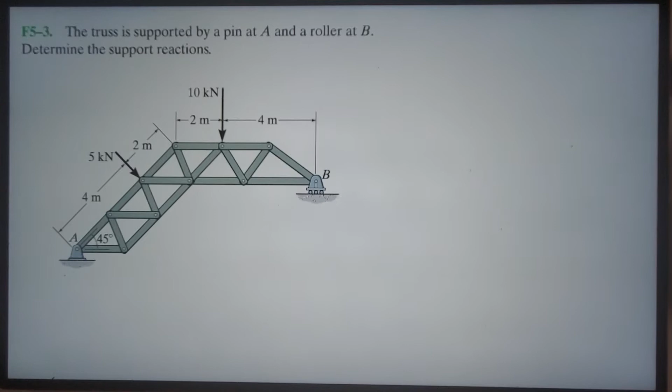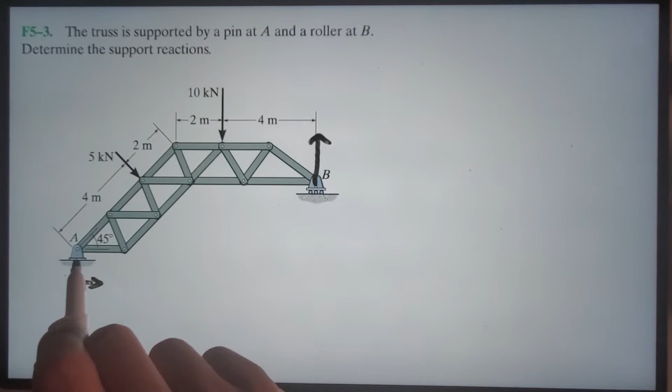This type of support has many balls over here, so it can move freely in the x direction. Over here, the force in the x direction should be equal to 0 because it can move freely. There's only one force acting on it, and that is the normal force, and it's pushing up against it. With this type of pin connection, you can have a force in both the x and y direction.

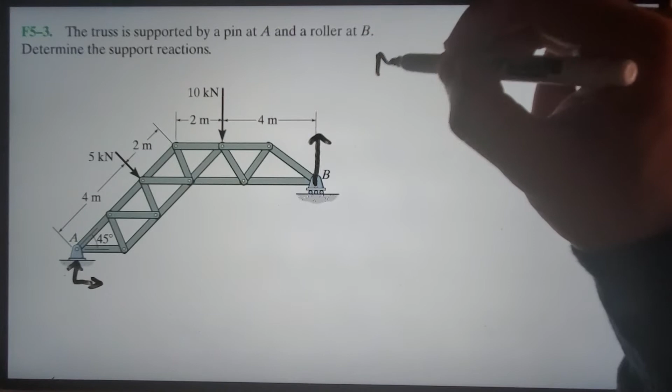Before we do anything, I'm going to write down the magic formula over here. The moment or the torque is equal to x times F in the y direction minus y times F in the x direction. All right, so we see all those forces acting on different positions. So I'm going to call this my origin. So this point is my 0, 0. I'm going to get the coordinate of each point over here. So this is point A, B, probably call it C over here, and call it D over here.

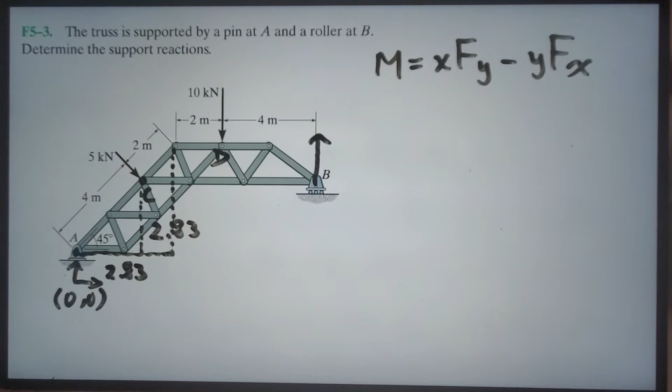Okay, so over here is 4 meters. So the x component from here to here, this is 45, so it should be equal to 4 times cosine 45, and that is equal to 2.83. That means the height over here will also be 2.83. All right, so what happened with the x value over here? I'm looking for this point over here. It will be equal to 6 times cosine of 45. That is equal to 4.24. So the y will be about the same. The y is 4.24 from the top to the bottom over here.

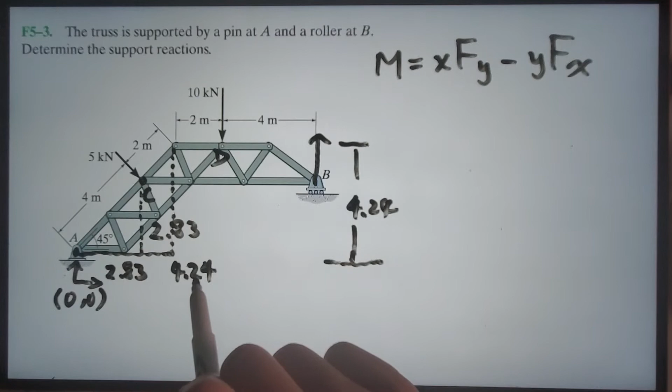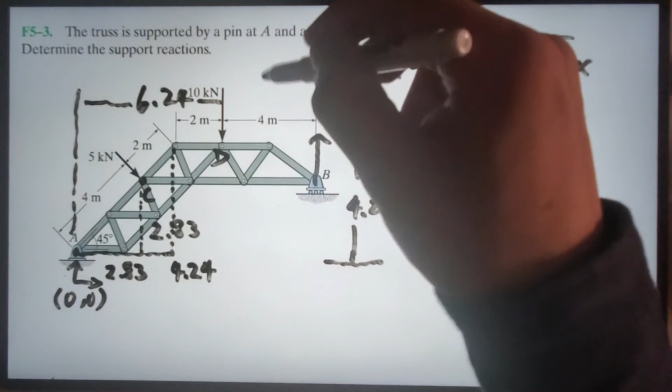All right. So what is the position over here at point D? Point D has 2 meters, so it should be 4.24 plus 2. So from here all the way to here, it will be 6.24. That is the x, and the y will be 4.24. The one over here, the x component will be another 4. So you add 4 to it, so it will be 10.24. That's the x of this one, and the y will be 4.24. All right, so we just found the coordinate of each point.

So how do I set up the equation? We may need more space, so let's write everything in a very clear way. Now, this is our pivot. We have 1, 2, 3 different forces acting on it. We're going to use the same formula. So this force has both the x and y component because it's 45 degrees over here. The x component is going to the right, so it will be positive 5 times cosine of 45 degrees, and that is equal to 3.54. So going to the right will be 3.54 kilonewtons. Going down should be negative 3.54 kilonewtons.

Okay, so x is over here. It is 2.83, so 2.83 times force in the y direction, that is negative 3.54, minus y, that is 2.83, times the force in the x direction, that is 3.54. All right, so we are done with one of these.

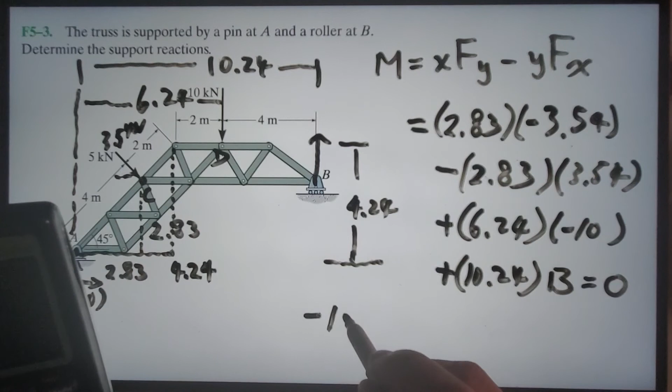So I'm going to use my calculator. It is 2.83 times negative 3.54. So the first term is negative 10. Minus this term again, also negative 10. This one, it is also negative. So minus 62.4 and then plus 10.24 times B. So that is equal to 0.

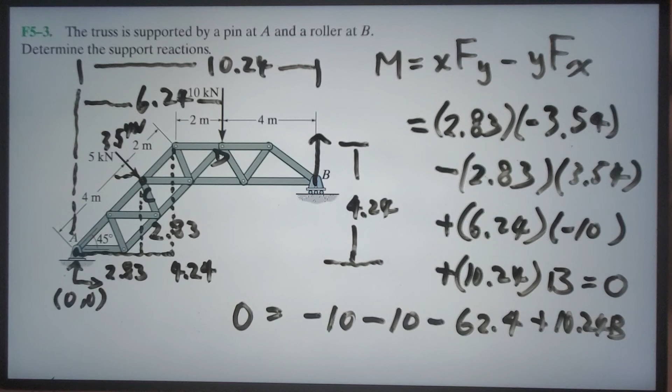Let's see if it makes sense. This force makes it go clockwise. That's why it's negative. This one will also make it go clockwise. That's why it's negative. And this one at point B is going to make it go counterclockwise. That's why it's positive. So I just have to add this up and divide it by this number. So it will be 10 plus 10 plus 62.4, divided by 10.24. So at point B it is equal to 8.04 kilonewton.

The lucky number for this problem, again, is 1. That would be the lucky number.